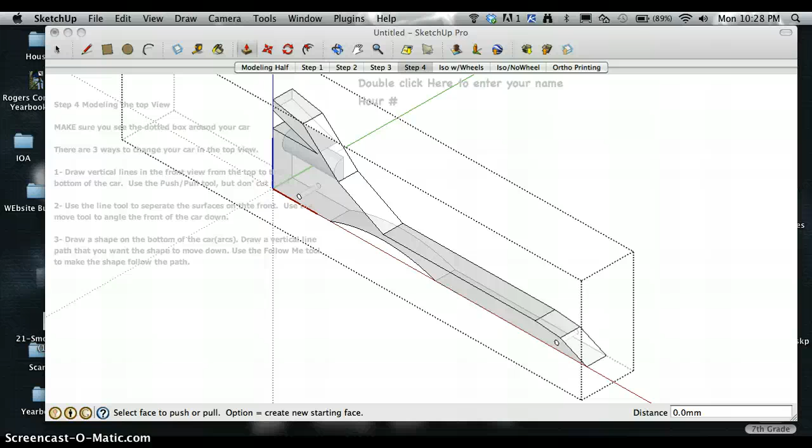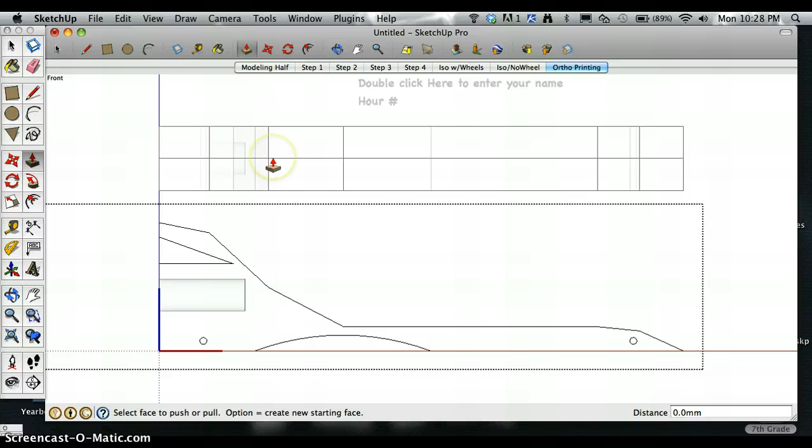Here we go, we've got our top or front view all cut. If I go to ortho printing, this is how I know I'm done with that - it no longer looks like the original block on the outside. But if I notice, my top view is still a complete rectangle. Yeah, there's some lines across, but there's no actual cut in the top view yet.

So a top view cut would be an angle in, an angle down on the front, or cutting a split out of the center. Those are the three things I'm going to show you now - how to cut the top view, which is step 4.

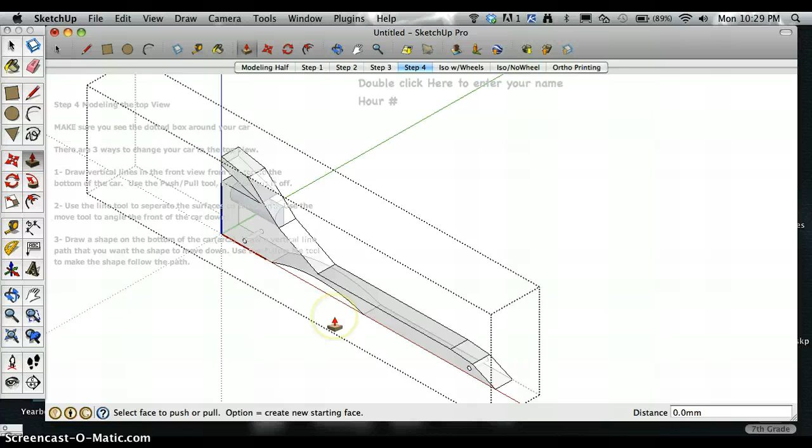First thing we have to do is anytime, like on the bottom of my car here, I have this arc cut out. I need the bottom surface to be flat because we're actually going to do our top view cut from the bottom of the car. The bottom and the top are the same, so it'll be easier for me since this flatter surface is to push through.

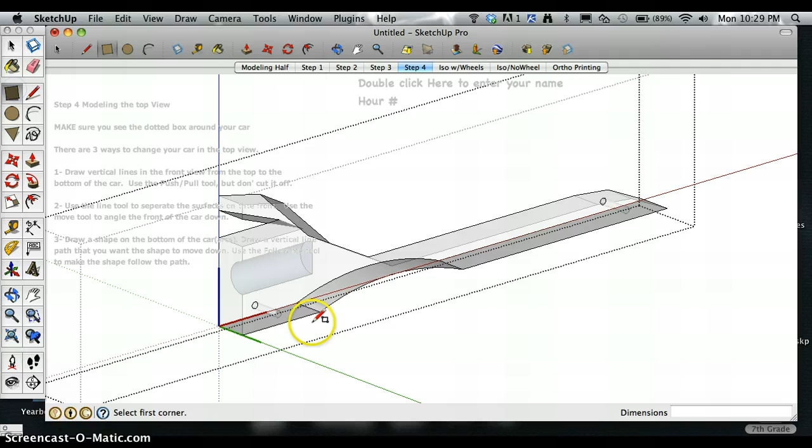So I'm going to click on a rectangle and just fill that circle back in. We'll delete it back out coming up here, but for now we're going to fill that in.

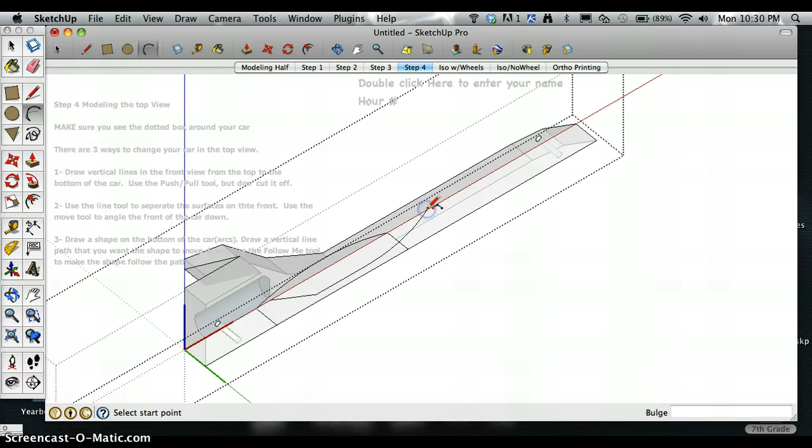Then on the bottom of my car, I'm going to draw what I want my top view cut to look like. I want to keep it on face the whole time. And we're going to cut that out like that.

Alright, now I'm ready for the push-pull. And when I push-pull this, I can only go down, I can't go up.

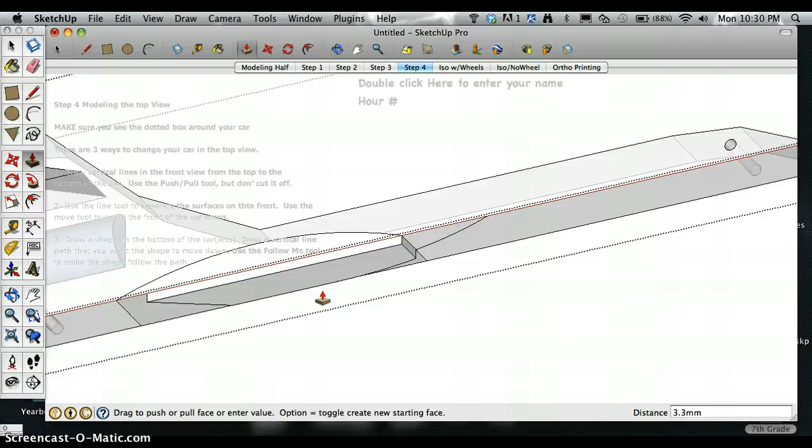What's happening here is it's seeing this arc and it doesn't know what to do. So if I look right here, it says option - on the keyboard, it's two keys over from the space bar. I'm going to hit the option key and you'll see my cursor turns into a plus, and now I can go up and through.

What it's doing is creating a whole other surface, so we have a little bit more work. Notice there's this little tag here that we've got to bring up and through, and bring it all the way to the top.

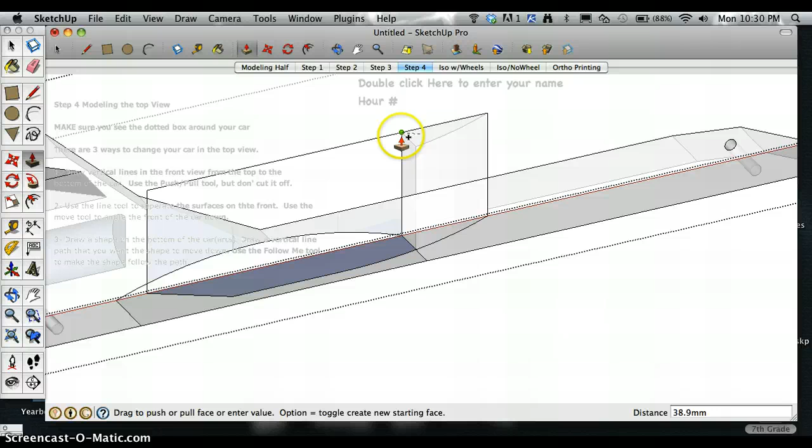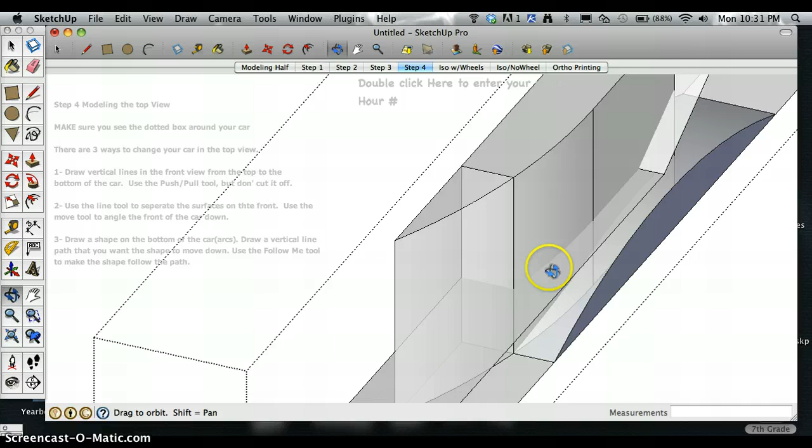Now this doesn't look like my car yet. So what I have to do is be able to erase out what I don't want. And to do that, right along here, I need to get it to draw a line - it has to do what's called an intersection of two surfaces to form those lines in there.

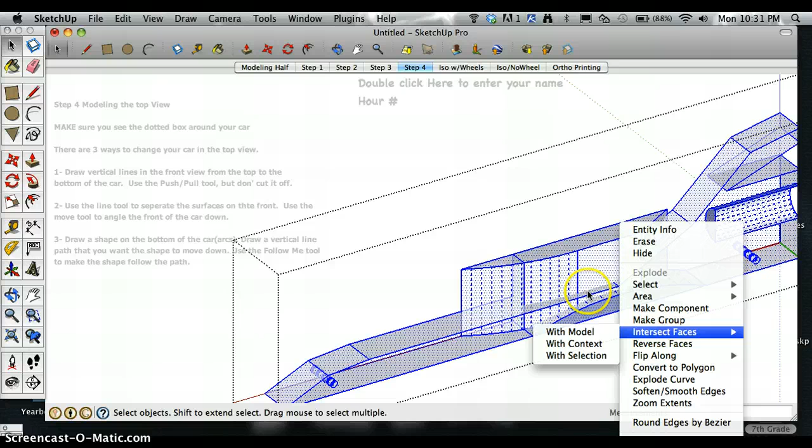So I'm going to use the select tool, triple click on my car so everything's highlighted blue. Then I'm going to right click and hit Intersect Faces with Model. I'm going to have you watch right here and you'll see the line show up. See how that line showed up?

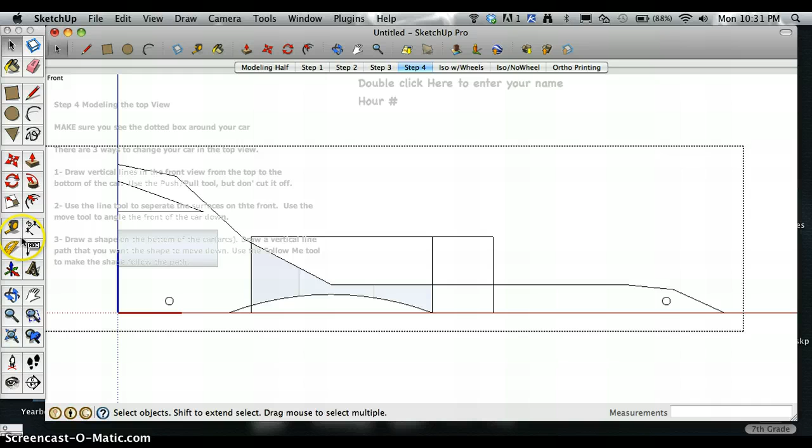Now we have to do our erasing. So I'm going to go to Camera, Standard Views, Front. And I'm going to erase everything above here I don't want anymore, and everything below here. So I'm just going to use the eraser tool and keep erasing until everything above my car is gone and everything below my car is gone. So I'm getting my arc back gone here.

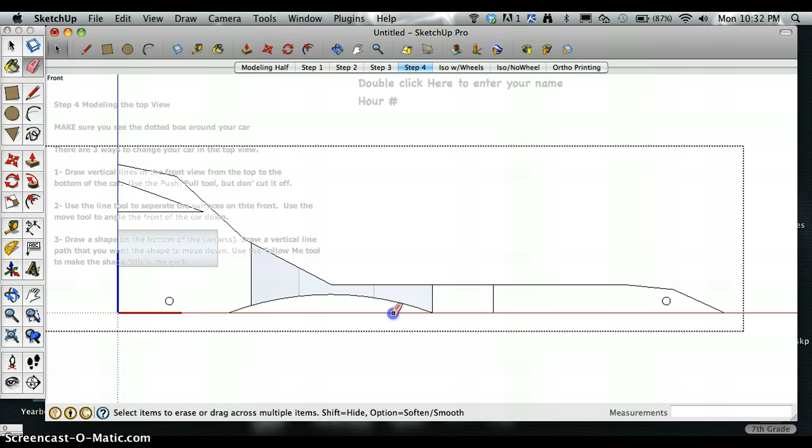Then I go Camera, Standard View, Top. And I know on the outside here I don't want this, so I'm going to erase until everything out there is gone. Some lines you've got to erase over a few times because there's actually three or four lines stacked up there.

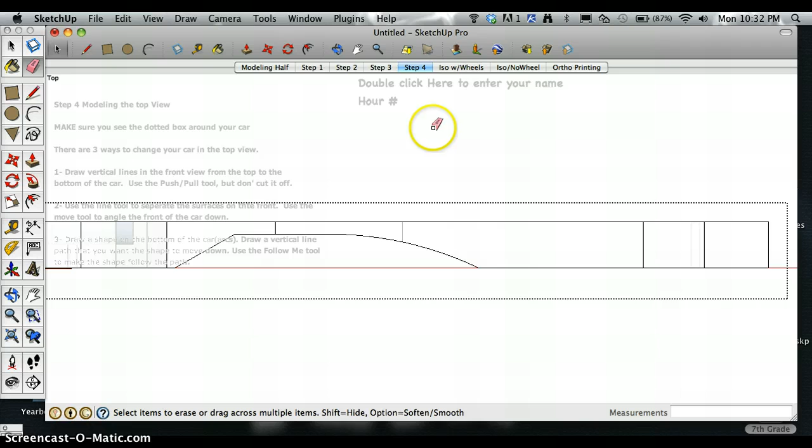Then I go ISO wheels or ISO without wheels. Touch up anything else. Lines on curves like this I can't erase - if I erase that, it erases that whole surface. So I'd go Edit, Undo, Erase.

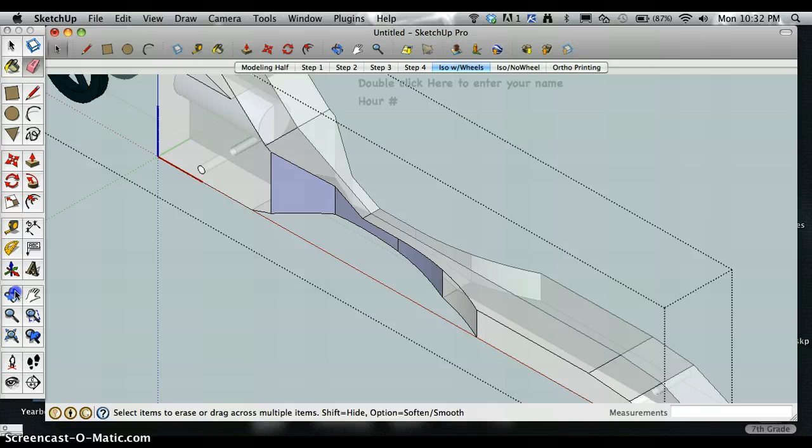And I can see now there's one more line right there I got to erase. I can see it on this half, but I have to erase it on that half. Now if I go to ortho printing, I can see my car is no longer a complete rectangle.

Next one that I'm going to show is how to angle this front down. Now the key with angling that front down is be careful so you're not cutting that axle hole there.

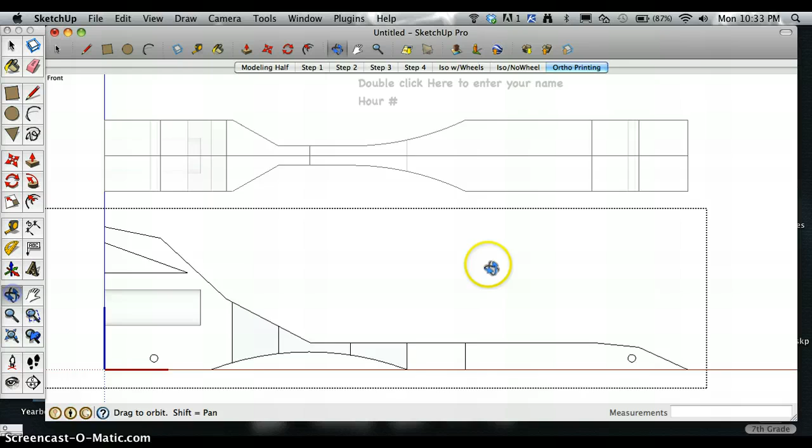So I'm going to rotate this up, go back to step 4, and again I'm going to draw on the bottom. I have two choices here: I can do a straight line, which is going to make a point, or I can do an arc. So let's do the arc part.

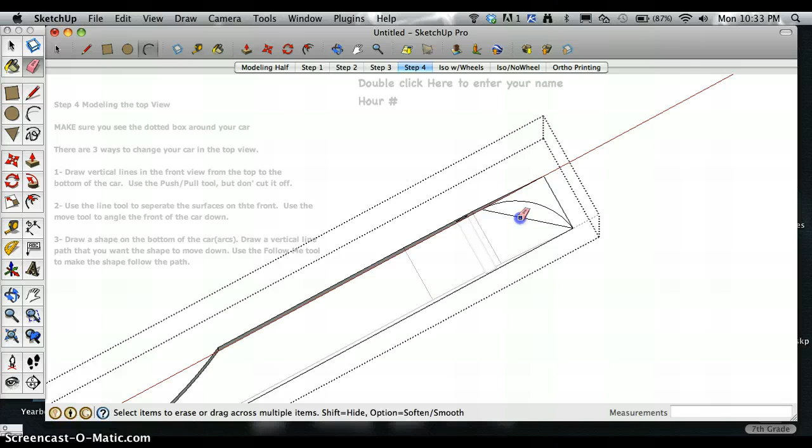So again, I make sure I didn't cut through the axle hole. Do the push-pull, again I look down here. Oop, I gotta hit Option. Push-pull it up above the surface. Click the Select tool.

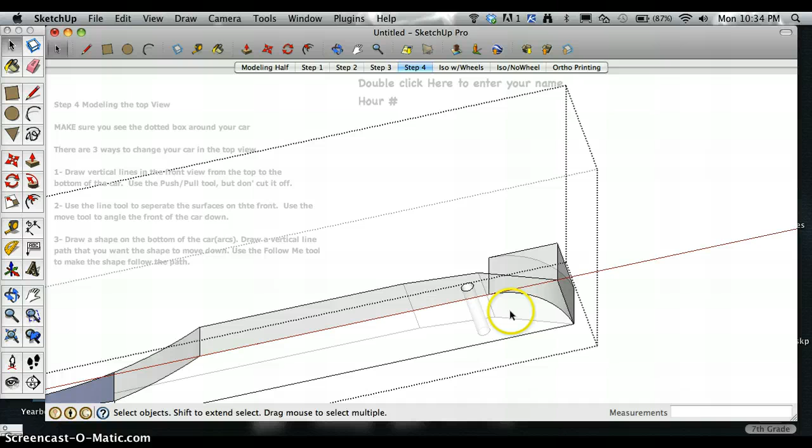Triple click. Right click. Intersect Faces with Model.

Now I can erase out what I don't need. So I know none of these surfaces I need up here. And then this side down here.

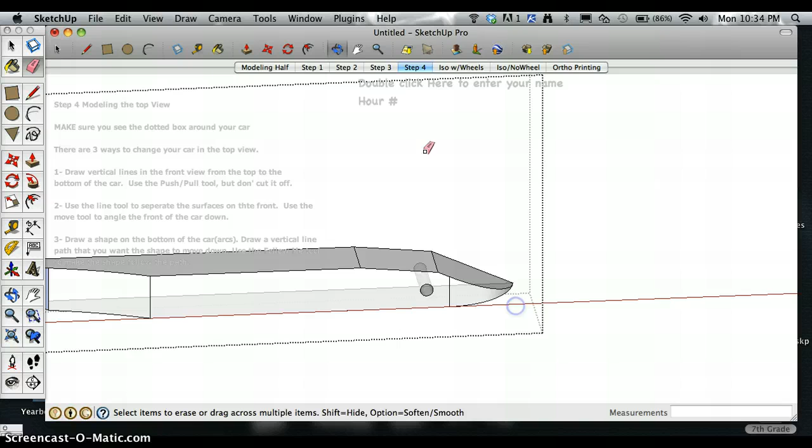ISO with wheels. I can see it's rounding off the front. And it's coming together pretty nice actually.

So now the last thing I want to do is I'm going to show you how to make a forked car, which basically cuts a notch out of the inside here.

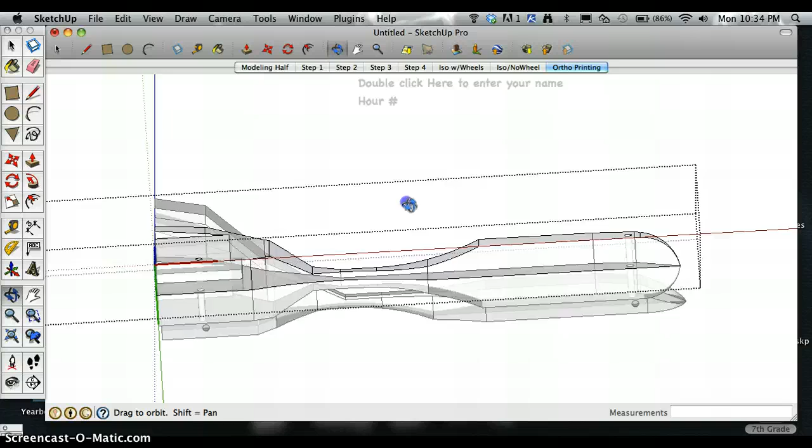So I'm going to go back to step 4. Again, rotate to the bottom of the car. Again, go camera standard views bottom.

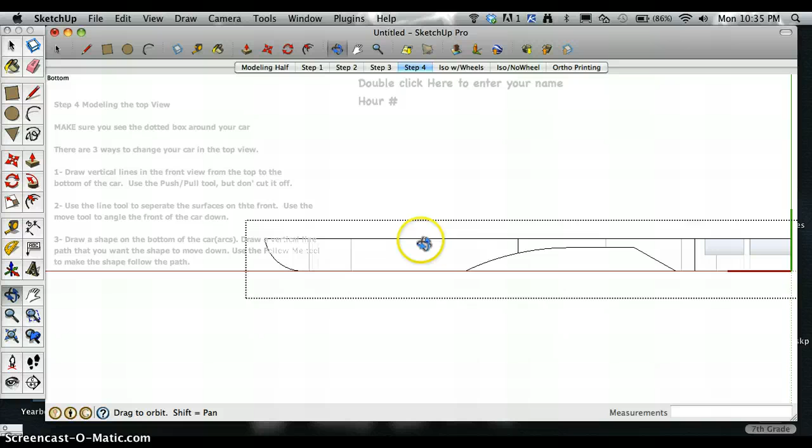And then when I'm cutting a forked car, I want to make sure I'm cutting out of the same edge that the CO2 cartridge is. I can see here's the CO2 cartridge, here's the half circle part of it. So I want to be on that edge.

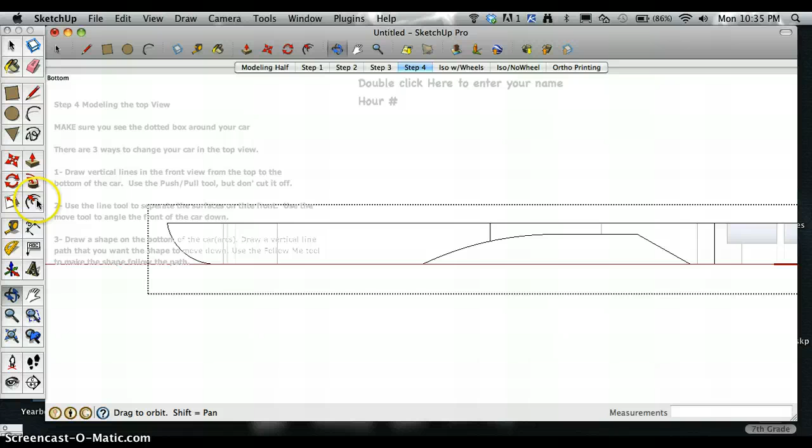And I'm going to use a quick tool here called offset because I want to make this line just offset in a little bit.

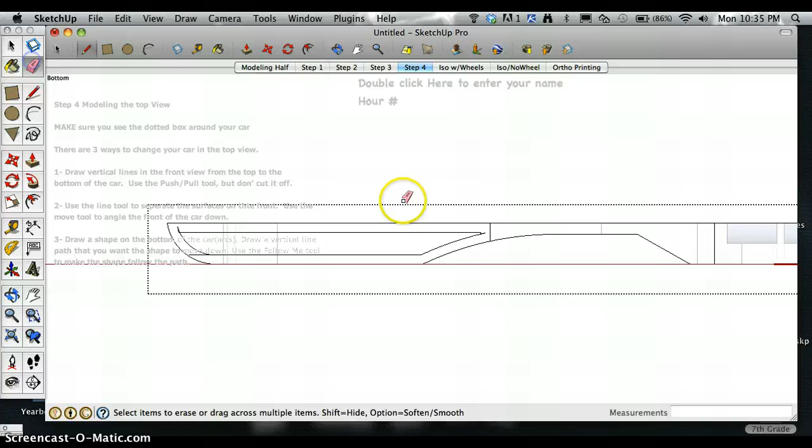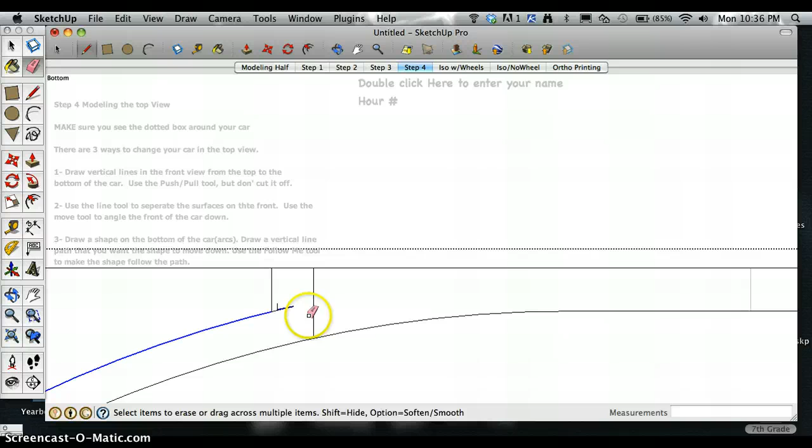Then I'll look at this and make sure I'm all the way out to the edge. And that should have separated these two surfaces now.

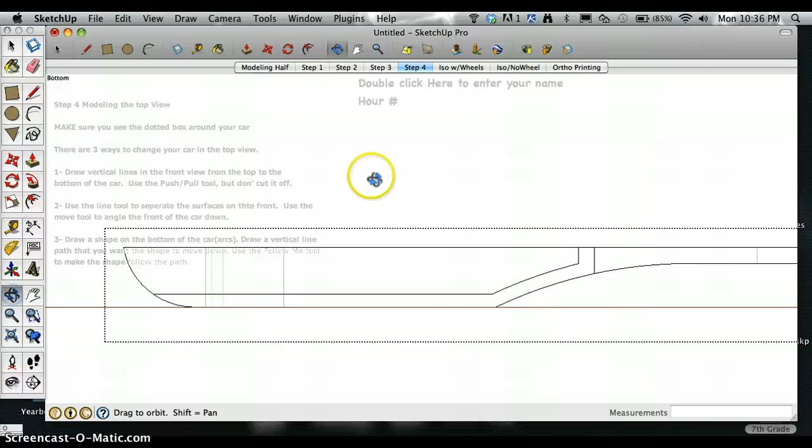Orbit this around. Push pull, again I'm going to have to hit Option. I can't go, hit Option. Go all the way up.

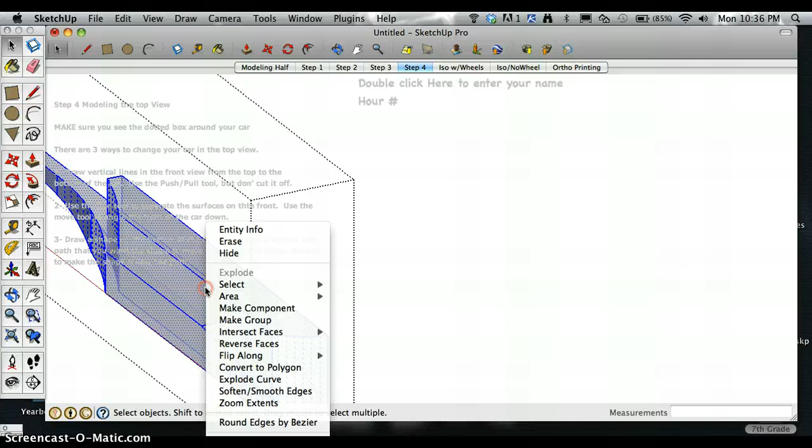And same deal: Select tool, triple click, right click, Intersect Faces with Model.

Camera standard view top. I'm going to use a little different method here. I'm going to drag a window, then everything that was touching will get deleted, hitting the delete key on the keyboard.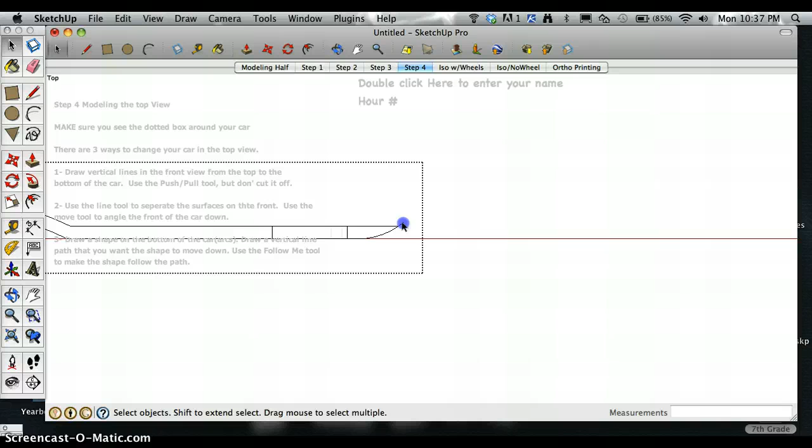And then camera standard views front. And then everything above my car can delete. And let's go ISO, no wheels. And that's how I create that fork.

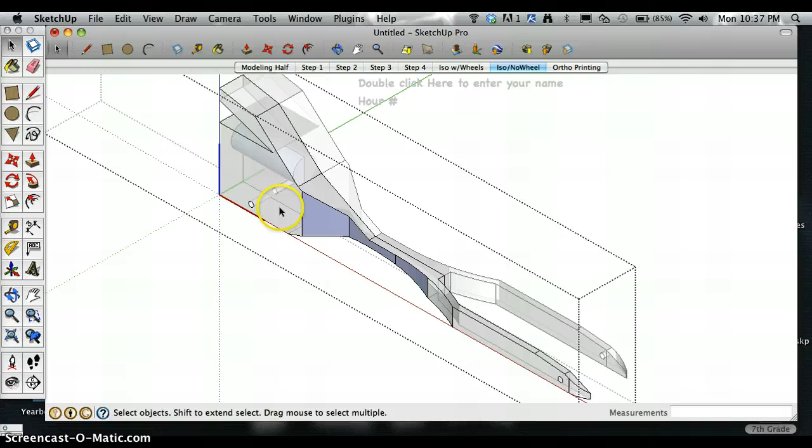So I showed you creating the side, angling the front down, and creating the fork. Again, our steps are to fill the bottom in so it's completely flat, draw our profile on the bottom that we want to cut, push pull with the Option key, select, triple click, right click, intersect faces with model, and then erase out what we don't need.

We should have a pretty good idea of how to make our car look decent in both the front view and the top view.